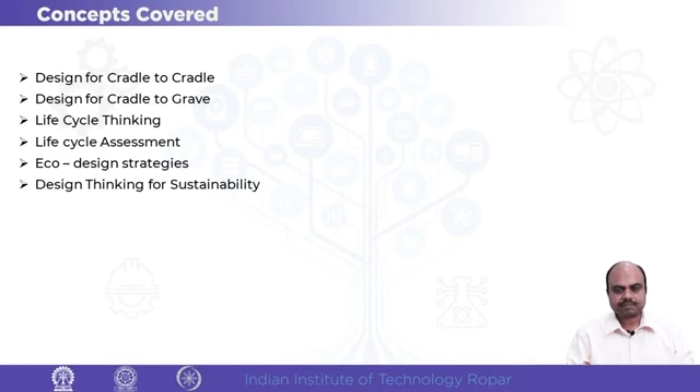In this lecture, we'll be discussing LCA in more depth, life cycle assessment. But before we discuss LCA, we need to understand some basic concepts. One is this design for cradle to cradle.

So even before that, we need to understand what is meant by cradle to grave. In this image which you see here, cradle, as you know, is when a child is born, we keep them in cradle. Grave is when somebody dies, we keep it in grave.

Similarly, for material cycle also, the material is going to go through extraction, to manufacturing, to construction, to usage, and then disposal. So, do you think cradle to grave is a good concept or not?

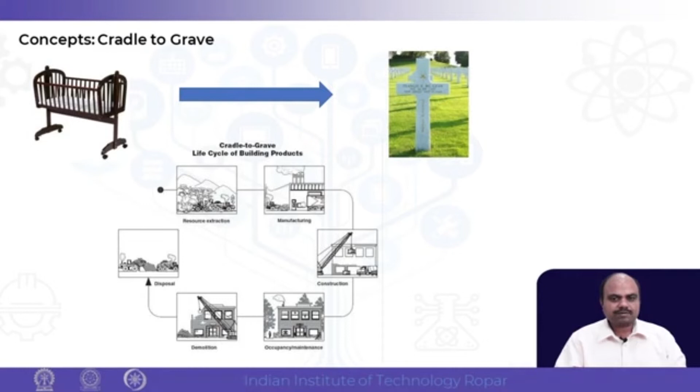Cradle to grave is going to increase the amount of waste. So we need to do something about this. That's why cradle to cradle is going to come. Cradle to cradle is where we are going to take the material and complete the cycle.

So while disposal, or even before disposal, we take care of the cycle from extraction, production, distribution, usage - we either reuse part of it, so it goes back to usage, or part of it could be recycled material, going again to manufacturing. Part of the materials can be recovery, that is, going as an ingredient from the raw materials.

But unfortunately, there will be some part which is going to go for incineration, landfill. If we can completely eliminate that, then we can say yes, we have achieved cradle to cradle.

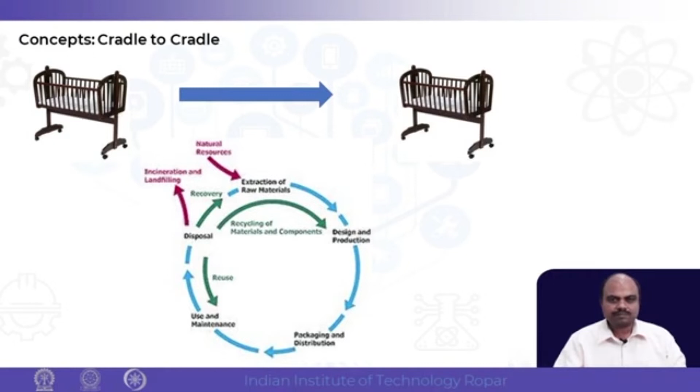So what is required for this achievement? If we want to achieve this, we need to start thinking in a different way, a way which enables us to have cradle to cradle. That is life cycle thinking - you think about the entire life cycle of the product and see how we can achieve this cradle to cradle.

So what is this life cycle thinking? It is essentially about enabling sustainable consumption and production. It is about going beyond the traditional focus on the production sites, manufacturing, to the environment, social and economical pillars. We have already learned these three pillars of sustainability.

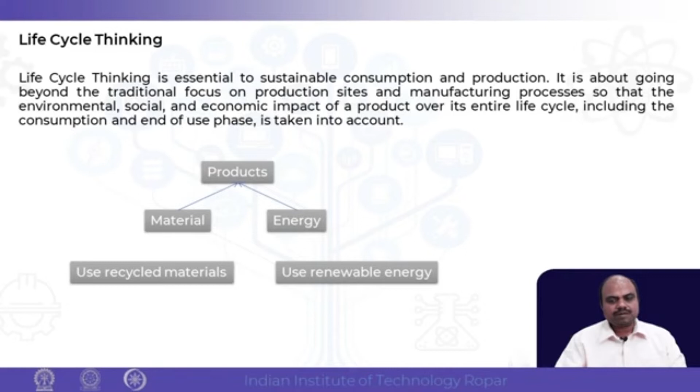And we need to think about the entire life cycle. That's why in product design it's so important that we think about the entire life cycle of the product, from consumption, from usage, and take care. Something else we need to think of - products have materials and energy, so we should use recycled materials and renewable energy as much as possible.

So product life cycle assessment, that is LCA - originally LCA is basically from cradle to grave. It's a quantitative system, a quantitative tool, very data dense. Standardization ISO 14000 is related to the standard of LCA, where part of ISO 14000, especially ISO 14040, talks about LCA. It has already become global.

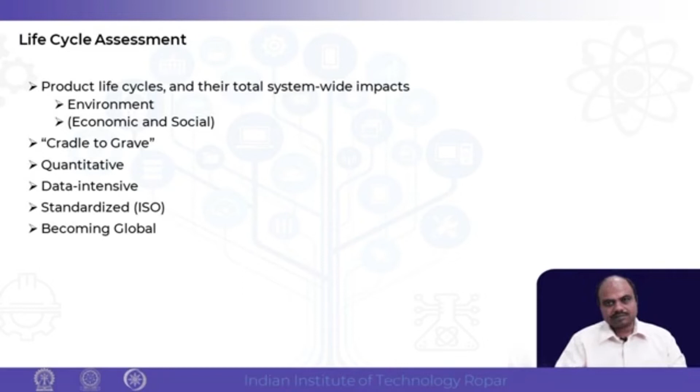Of course, there are some eco-design strategies which are very important. Some of the recommendations are to reduce use of material content of the product. So how can we do that? Previously, if you see the engine of a car, it is so heavy, not optimized. Later on, people optimized it, reduced the weight, so the material content is reduced.

If the material content is reduced, then what is going to happen? The car is lightweight, it is going to use less fuel, it is going to run faster. So if the material content of the product is reduced, then the material requirement for manufacturing the product is also going to reduce.

Reduce energy content - how to reduce? If you see any car previously, it is not that efficient, a lot of fuel has to burn. Now a car with the same 1 liter of petrol can last much longer - you can drive or cover a longer distance. So this is what it is about: energy content and energy usage.

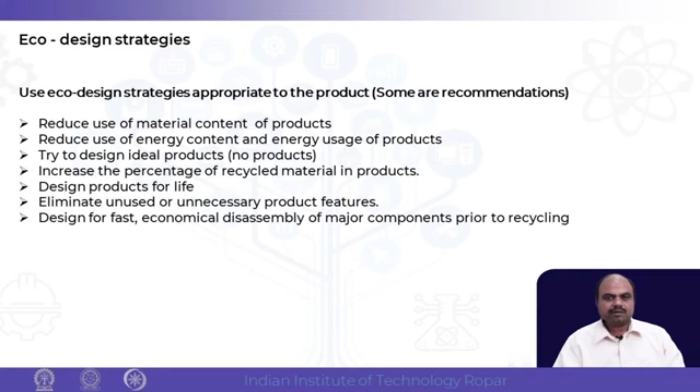Design for fast economic disassembly of major components prior to recycling. So we need another design strategy: when a design product is there, if you want to recycle or reuse, we have to dismantle it because the product is made with multiple materials. So if it's difficult to dismantle, it's difficult to recycle. Make it such a way that it is easy to do that.

Some other things are: design products compliant to standards and directives - RoHS, WEEE, REACH. Restriction of hazardous substances, WEEE and REACH. So these products which we are going to design, it must be standard compliant. Otherwise, we cannot sell this. Take for example any electronic products we make - computer, laptop, mobile phone, charger - all these things have electronic circuits. If you want to sell this product in international market or even national market, it has to adhere to some of the standards which are already in the market. RoHS, restriction of hazardous substances, is one of the standards. Waste Electrical and Electronic Equipment, that is another standard. REACH is another standard for chemicals. So these standards need to be maintained very rigorously.

Design products that could be used, reused, recycled and remanufactured, which means that when you are designing the product, we are not thinking about just usage, how people are going to get satisfied. No, that is the minimum thing. But apart from that, how we can bring back this material, make it a closed loop cycle. How can you reuse? How can you remanufacture? How can you recycle?

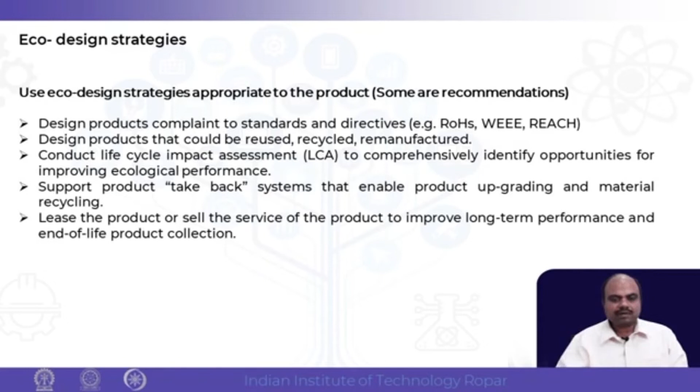Then lease the product or sell the service. That's why I told long-term performance and end-of-life collection, that is to be done in a better way.

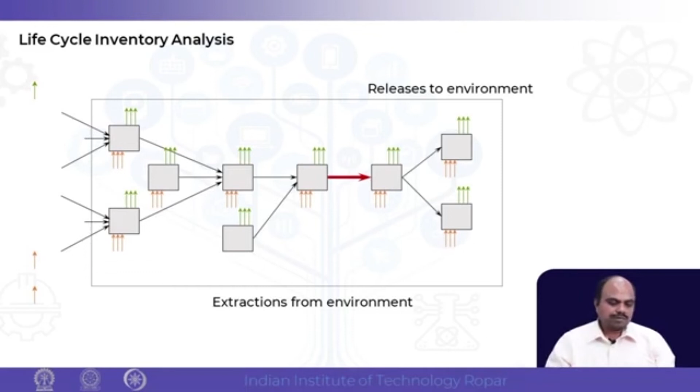So when you have the life cycle assessment, life cycle inventory analysis, if you take a black box - a product - what are the inputs, which are the things that go into making the product? It is generally product, material and energy, and what is released to the atmosphere. Sometimes it is waste, sometimes it's product, sometimes it's byproduct and other things. So this is the basic analysis we should do - input and output analysis.

So now we are coming to sustainability and eco-design. How will you do sustainable product design? Take a product or a concept, select whichever you like for analysis, then analyze it using life cycle assessment, find out the amount of material and energy usage during the entire life cycle and each phase, redesign it wherever you see a lot of possibilities for reduction, analyze it again with the LCA and then compare and do the improvement. So this is a good way of reducing emissions, reducing waste, reducing pollution. Emission doesn't always mean carbon dioxide emission or equivalent - the waste we are creating is also basically waste, something which is undesirable.

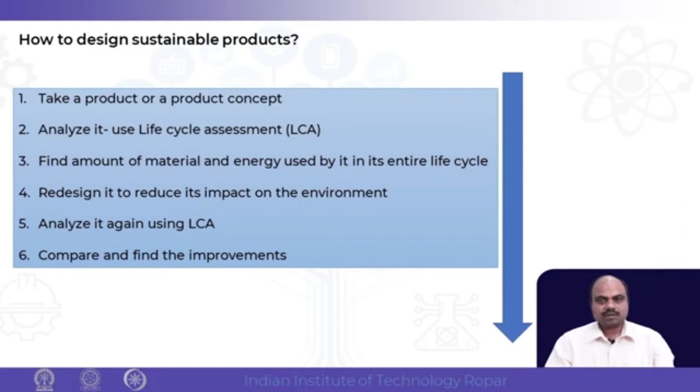Now we are going to go a little bit into LCA. Life cycle assessment is a method in which energy and raw material consumption and different types of emissions related to a specific product are measured, analyzed, and summed over the entire life cycle of the product. It is a cradle to grave concept, and it started in the 1970s. Emissions and raw materials were added later, and LCA is considered a comprehensive analysis or assessment.

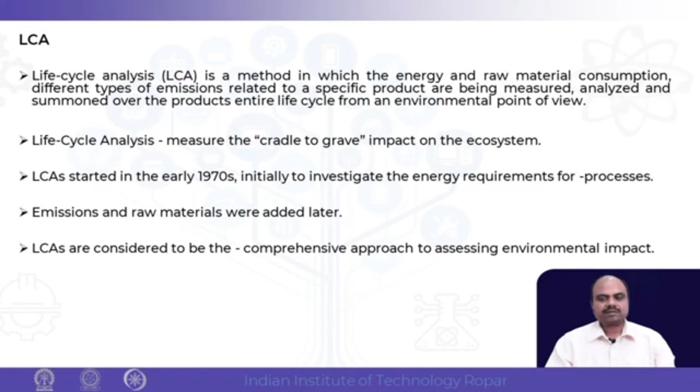According to the ISO 14040 standard, this is the framework for life cycle assessment. You start with goal and scope definition, where you try to figure out exactly what the scope and goal of this issue is, and what problem we are going to address. Second is inventory analysis.

Inventory analysis is where you assess the entire life cycle of the product, starting from the extraction of raw materials to manufacturing to design, and so on. It covers exactly what is going on in the product and what exactly is coming out of it.

Then we go to impact assessment. For this you can convert it to CO2 emission, CO2 equivalent, and various other assessments, and you can use assessment criteria like assessment methodologies also. This can be done either manually or using some kind of tools.

The interpretation goes all the way around from the goal definition, inventory analysis, and impact assessment. This interpretation is basically telling us how we are going to interpret this analysis, based on the expertise which somebody has in LCA, and where the issues are in the results.

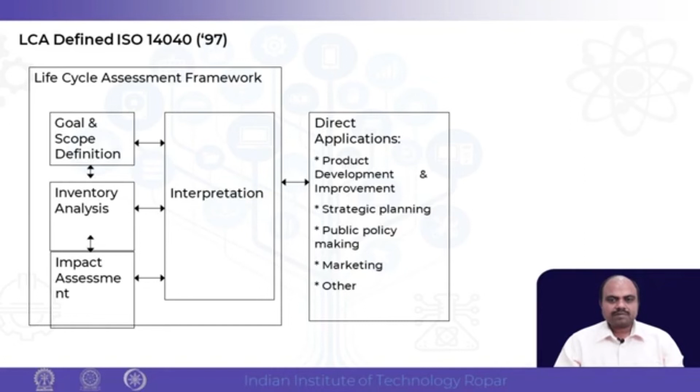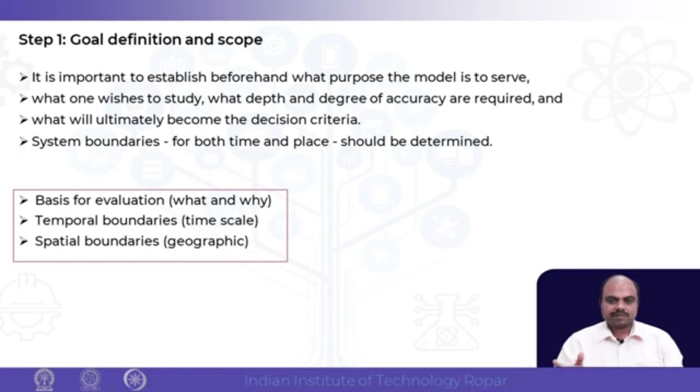Take for example, we are going to identify the pen. If you want to do LCA for a pen, are you talking about only the pen, or the machine required for manufacturing this pen, or something else? So what are the system boundaries? What are the basic evaluation techniques? What are the temporal boundaries? What are the spatial or geographic boundaries?

Next is goal and scope. Here, what is the functional unit? System boundaries, assumptions, limitations, allocation methods.

Allocation method is something like, if you have the same machine, same manufacturing base, same manufacturing room used to manufacture two or three different components, the emission caused by each machine has to be attributed or divided in such a way that some amount of emission is added to one product, and similarly for others.

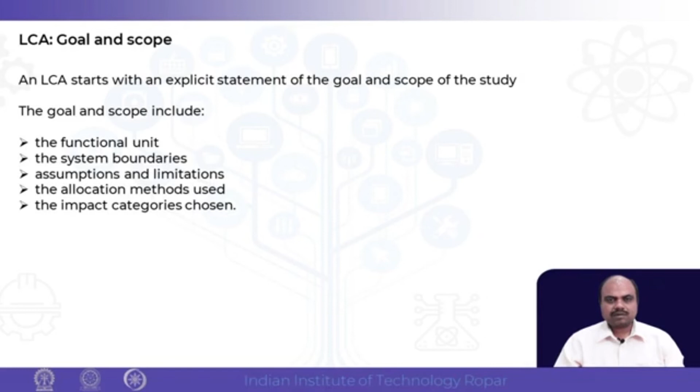Impact category chosen: are you talking about CO2 emission only? Are you talking about health issues? There are so many ways in which you can measure the impact. Which one are you going to take? There is no standardized method for this, but there are some methodologies which can be used.

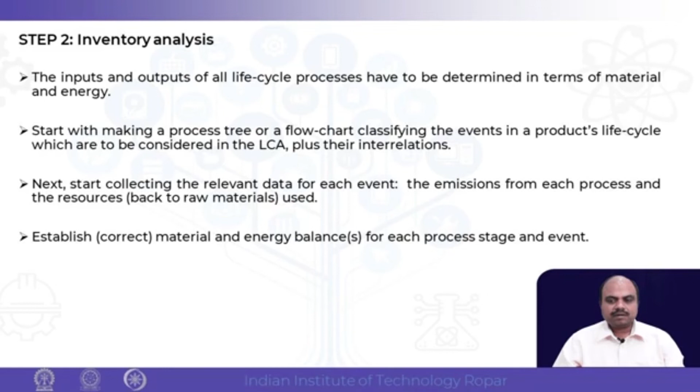Inventory analysis is the input-output analysis determined in terms of material and energy, telling us what things are going in and out. You start making a process tree, classify them, find out relationships, analyze relevant data, and establish the connection between material and energy balances.

Next is life cycle inventory analysis, LCI, involving the inventory flow from and to nature. What is going from nature? What kind of material, at what stage, what energy? And what is going to nature in each and every life cycle phase of the product.

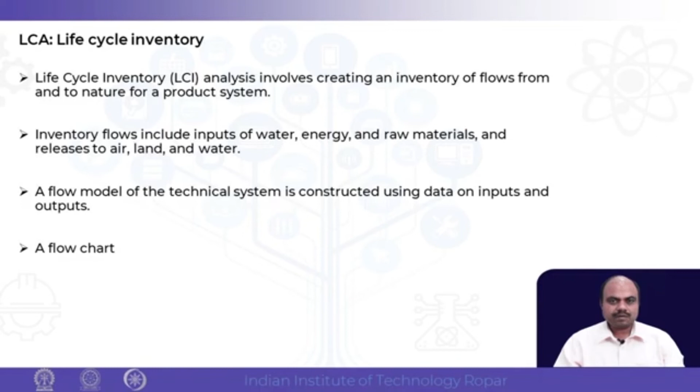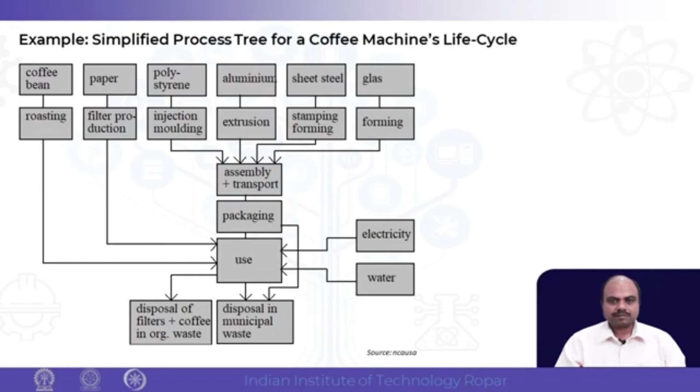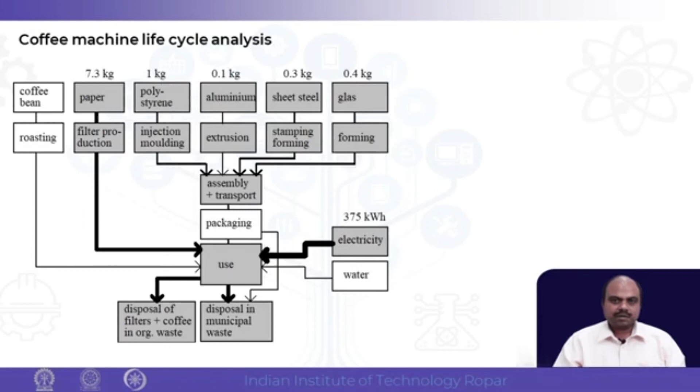Then you put materials in terms of how much material is being used: 7.3 kg of paper, 1 kg of polystyrene, 0.1 kg of aluminum, and all these things, each of this, and also energy. This is a very short version where more detail is of course required, and then you find out how much electricity is required.

Then you put life cycle assessment. It contains impact categories, category indicators, characterization models, classification stages, and impact measurements, the LCA flow.

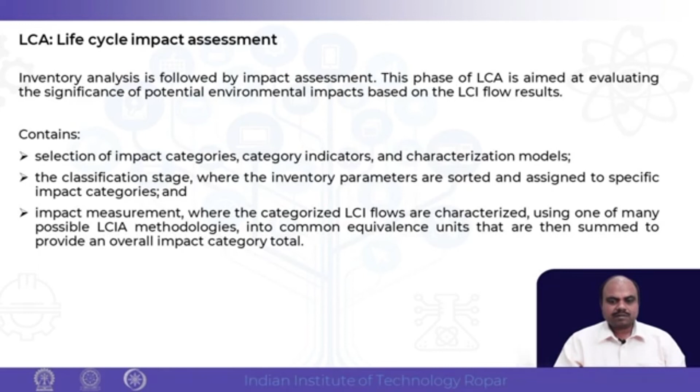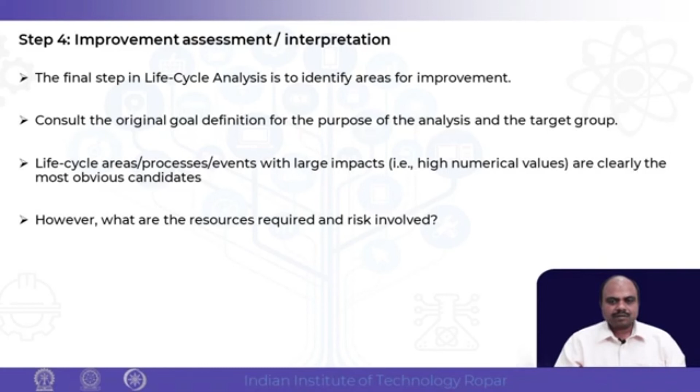Then impact assessment, interpretation, final life cycle stage analysis is done, goal definition is done, then it is having high impact, larger impact, and how these resources are required. This is all the interpretation we are doing in this step. Then LCA.

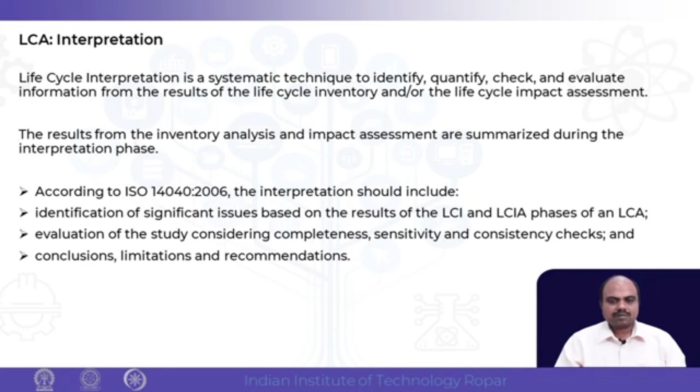Interpretation is a systematic technique to identify, quantify, check, and evaluate information. Here we are using ISO 14040:2006 version, the new one also. It is with respect to LCI and LCIA, we evaluate, study and consider completeness, sensitivity, and consistency, and then conclusion, limitations, and recommendation. Now one thing one is going to ask: emissions are taking place, so how is this related to human health? So this slide is going to show that.

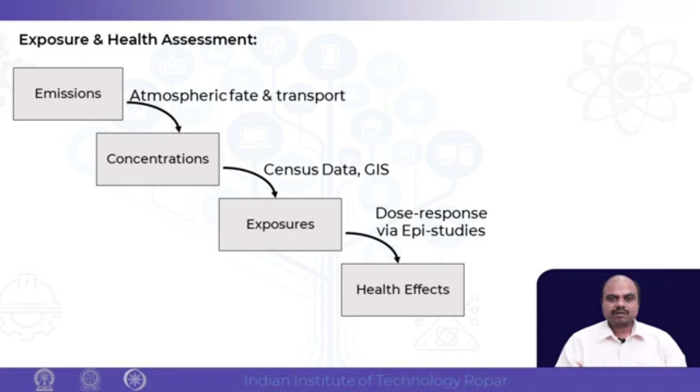Emissions are adding to the atmosphere. Concentration, like how much emission, at what rate we take, and then we use census data. Census data means one location, how many people are there, and the year data, and then some kind of research has been done to map this with respect to health effect.

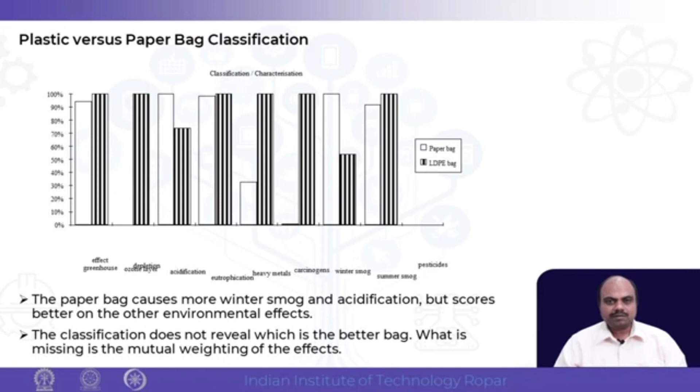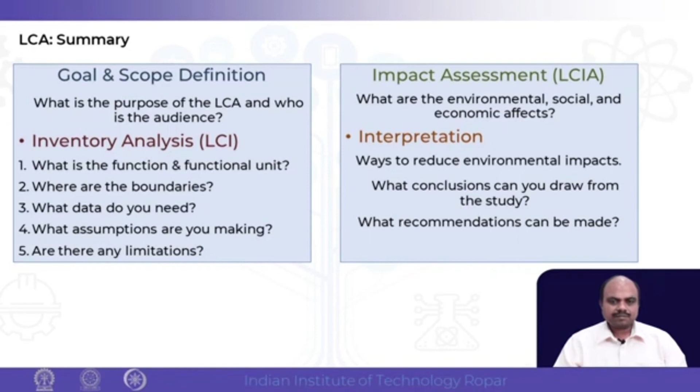LCA is a really difficult task. It requires a lot of data, a lot of analysis. So for a smaller product, you can do it manually - we have done this many times in research. However, for bigger products, we need help.

There are some very good software available, with data initially for US data, European data, and now a lot of Indian data is also available. This software helps, especially in the impact assessment, from the emission to impact assessment, finding out the values. GaBi is very well known. SimaPro is another well known tool. Then IDEMAT is another one - LCA, TEAM, EcoScan, IVAM LCA data. These are things which can be used. The first two are very important and very widely used. Any of these software can be used for this.

Now, design thinking. Design thinking can be extensively used in sustainability to achieve sustainability, and here we are going to get a little bit of understanding of this. Design thinking is an innovative and creative approach that we already know, to solve the most complex problems, and achieving sustainability is also regarded as a very complex, multidimensional problem. So design thinking aims to develop creative and user-related ideas to find out resolutions and positive impact on the future.

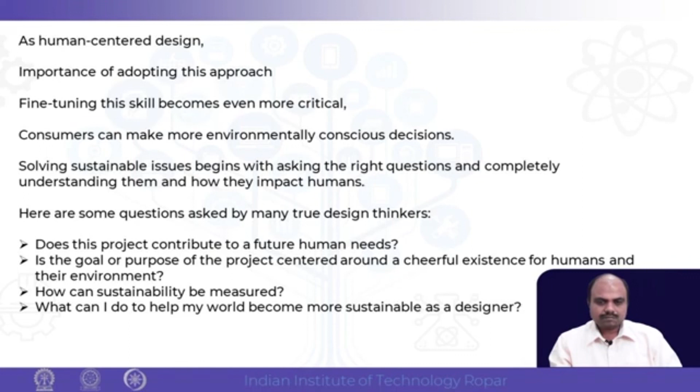Does this project contribute to future human needs? Not just about making money for the company. Is it useful to the customers? What is the goal and purpose for this, and does it make people happy in the environment? And how can sustainability with respect to this particular design be measured? And can I help people to be more sustainable?

So what is design thinking for sustainability? It is within a current environmental, economic environment that is continuously evolving, and socio-economic factors are propelling the marketplace. Organizations are being motivated and have challenges to shift from top-down to bottom-up strategies, and governance leaders need to focus on sustainability, CSR, and environmental social responsibility. So it helps a lot to involve people, especially designers, to think about sustainability using the design thinking approach. Thank you.